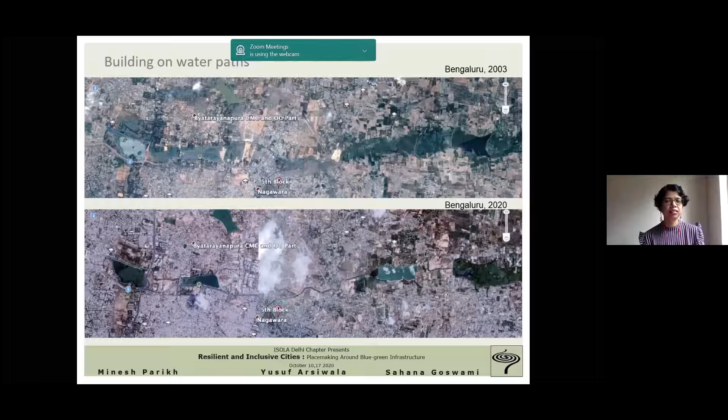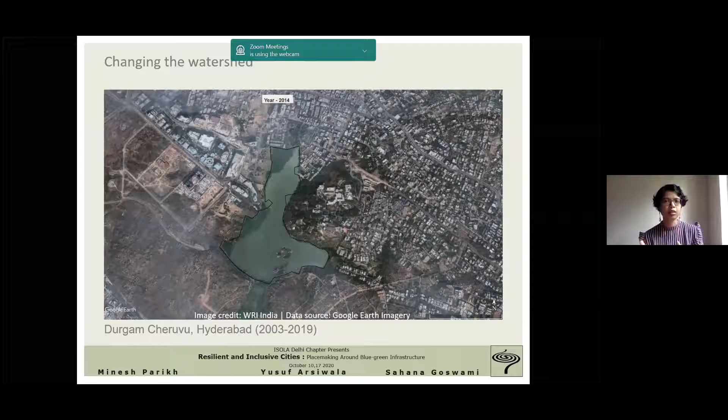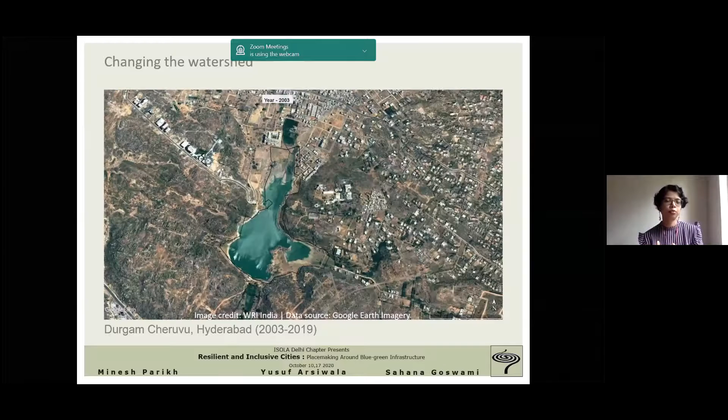Alongside where we build, the question is how extensively we are building. And we are really drastically changing the watersheds and the natural landscapes. We continuously replace areas which used to be able to soak up water with tarred roads or concrete surfaces and other impermeable layers. And eventually rainwater or stormwater is just going to flow off these in larger volumes at quicker rates and lead to events like flooding. Again, this is just a compilation of Google Earth images for the city of Hyderabad near one lake between 2003 to 2019. And we can distinctly see the amount of change that we have brought about. The next slide, please, Yusuf.

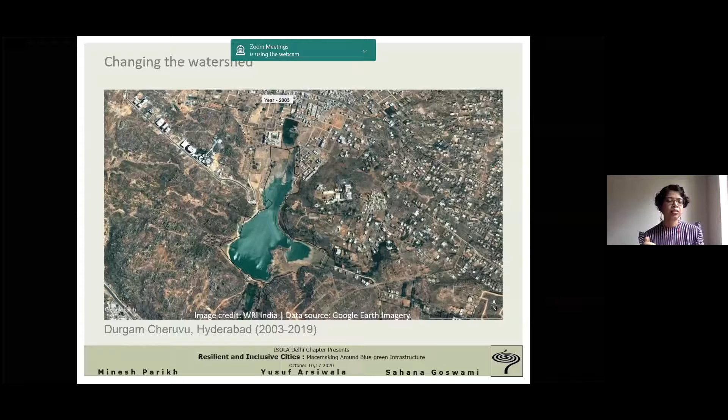So as we modify nature in our cities, we are eliminating or constraining our natural spaces, these blue-green spaces like wetlands and lakes. And in our cities where we build infrastructure and storm drains, if we build them at all, that's another question. But where we build them, they're really not capable of meeting the stresses brought about both by the way we have built our cities and the events because of climate change.

So WRI India has been developing some research based on a study of satellite imagery using remote sensing techniques. And I'll be very happy to share some of these preliminary findings for the Delhi region specifically, because I think that'll be of interest to you. But again, please keep in mind, this is preliminary. It's subject to change as we go on. Next slide, please, Yusuf.

So first off, what we looked at is what we call built up area. So this is roads and buildings. And we looked at an area of 50 kilometers from the center of Delhi. And what we see is between 2000 to 2015, this built up footprint has remarkably increased. What we call the core city area might have seen a little lesser increase, about 20%, but between 20 to 50 kilometers, it's a 116% increase. And you are people from Delhi, and you do know that this region between 20 to 50 kilometers is where Gurgaon falls, where Noida falls. Clearly, there are interconnections with where and how we are building and how that's changing the natural environment.

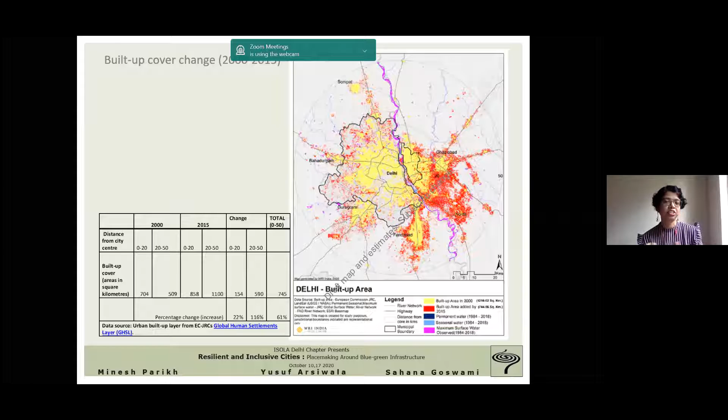But how exactly has it changed the natural environment? If we see the next slide, what we are looking at here is vegetation cover. And again, in the 0 to 20 kilometer region, if you look at the table, the top row, we see that there is low loss and low gain, which is fairly similar. But in the 20 to 50, that low loss is huge. It's like 1700 square kilometers that's lost. And what does this low loss or high loss mean in terms of a study? To put it in simple terms, high loss would indicate that there was a forest and it was chopped away.

High gain means that an entire forest grew in the 50 kilometer region. That's not happened for Delhi. But the amount of low loss means that small scale vegetation has definitely been impacted. And of course, there's one point to be made of inequity, if you will: the core city of Delhi definitely has much more green spaces than the rest of the areas.

And again, we know that having access to vegetation, along with the physical and mental health and well-being aspects, there's just the clear impacts on microclimate, on pollution, etc., that might be felt. And there's this inequity that Central Delhi definitely is getting a better deal out of this right now.

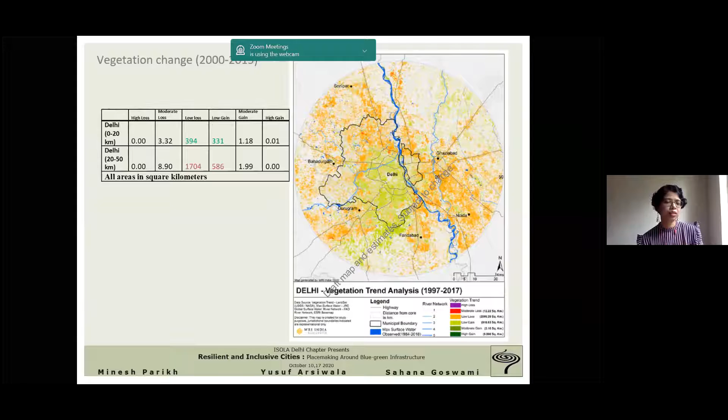And in the next slide, there's one other aspect that we looked at, which was groundwater recharge potential. I think this is something important considering the water situation in Delhi, and Delhi is fairly groundwater dependent, like much of India. In the study, what we looked at is, between 2000 and 2015, where has new development occurred? And we looked at assigning different recharge potential values based on vegetation cover and slope.

There's obviously complex equations to that, but this is the sort of mapping we get of where new development has occurred and what sort of recharge potential zones it has consumed. And what we see is 33% of new development that has happened in that entire 50 kilometer study region has been on high recharge potential zones.

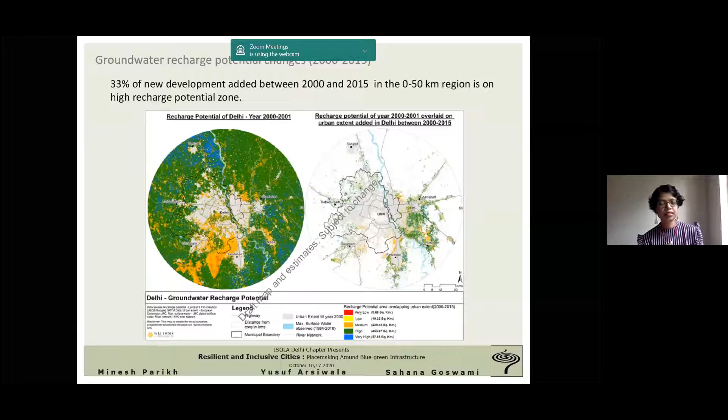And if we go to the next slide, what is the implication of that? What happens if we are building on high recharge potential zones? So on one hand, Delhi is fairly highly dependent on groundwater, but because we have built on areas where groundwater could potentially have been recharged, we have lost that volume. That volume is no longer recharging. And what is that volume that is lost?

Some estimates that we have done in this study put it at 286 million liters per day, which is huge. And if we just consider the population that's been added in Delhi, about 8.8 million in the 2000 to 2015 time period, 32% of that demand could have been met from this 286 million liters. There are implications clearly, because that water, instead of the Delhi water utility having to source from elsewhere, potentially could have come from groundwater if we had thought of this.

So clearly there's this connection that we have to think of between how and where we are growing and how it impacts our resources such as groundwater. The next slide, please.

So before I go into explaining what's on the slide, one thing to think of: all this research that I've shown, how does it impact us as landscape designers, or why should we consider this? And I truly believe that in your professional capacity as landscape designers, you have this ability to implement change, whether it's large or small.

Not everyone has to be doing huge projects, but whether it's the smallest, most effective rainwater harvesting system that you're able to construct for your client, or a rain garden, or an entire lake restoration or a rewilding of a park, all of those efforts can make a difference to the city's water scenario and water ecosystem, and eventually the entire natural ecosystem that we have.

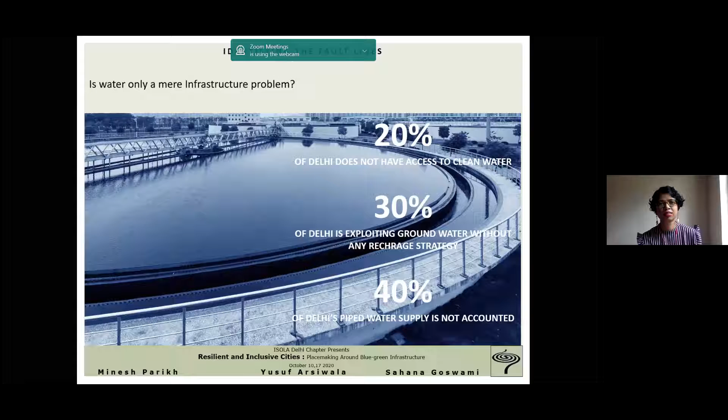So, what are the larger issues? Sahana has already gone through it, but I will be talking at a scale which is more relevant, where something can happen right now. My question is, when we talk about water, is water merely an infrastructure problem right now? Or are there certain other aspects underlying this issue?

So around 20% of Delhi still does not have access to clean water. 30% of Delhi is exploiting groundwater, as Sahana has already given a figure of how much groundwater loss we have had based on our building and increasing population. But there is still a lot of dependency on groundwater. Around 40% of the Delhi population getting piped water is not accounted for. So the agencies providing water are also running at a loss.

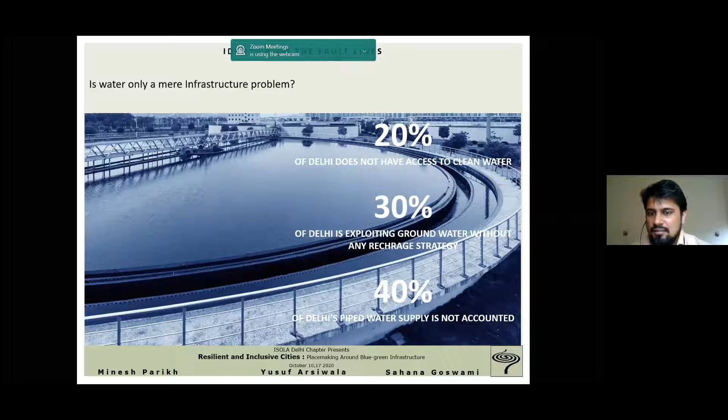So we are still building upon centralized, massive, expensive water infrastructure, and it is becoming completely outdated as we move ahead. It costs us money, valuable public land, and is not environmentally resilient. So what are the gaps? Why do we feel that water infrastructure is lagging behind? The most important reason is that the water infrastructure and the natural water systems are not being looked at together. Both of these exist in different domains.

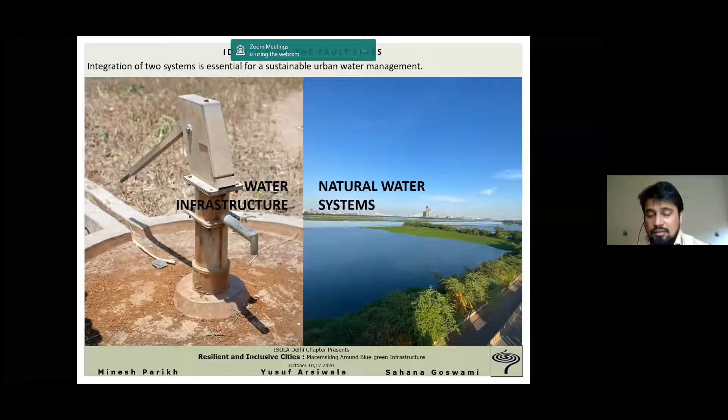So my question to the audience is, I don't know how many of you know your source of water, where your water is coming from. Is it coming from groundwater? Is it coming from a river? Is it coming from a lake? People do not know where the water is coming from, and that is the gap coming up across Delhi and across India. The system of getting water is directly proportional to how water comes into existence and is available naturally. And this is a point which has been completely ignored right now.

When we talk about the history of Delhi and the history of tanks and Bawlis, and how the water infrastructure at that time was, it clearly states that historically Delhi had decentralized water infrastructure that used groundwater as a source. We had more than 100 Bawlis historically present in Delhi. Only 10 exist right now, that too not in very good shape, and out of those, zero are in use in their original form. Most of them are archaeological sites being used as tourist destinations.

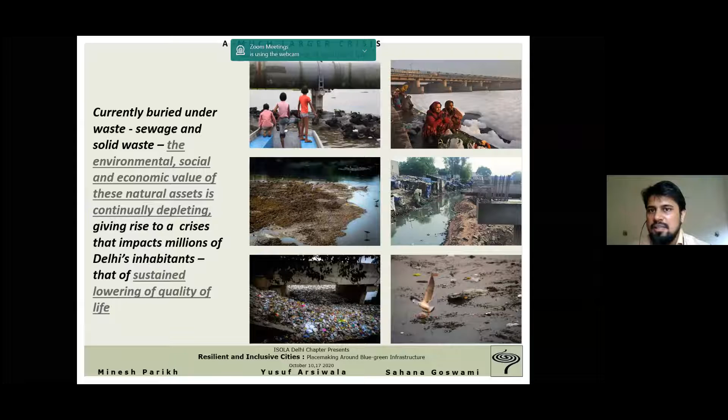Investments are hindered. The foreign investments we all talk about: foreign expats who want to come and settle in Delhi have serious reservations because of the nature of our environment and our ecology. So we all know that this is the problem. In 2016, the Delhi Jal Board realized this problem was happening at a large scale, and said, why don't we improve the situation?

If we want to quantify the problem, we have to restore around 750 kilometers of surface drains and around 1,000 water bodies. We have to recharge around 1,500 square kilometers of underground water, which will eventually improve the quality of water in the river Yamuna. After all this is done, the city's economic and ecological value would increase on a global scale.

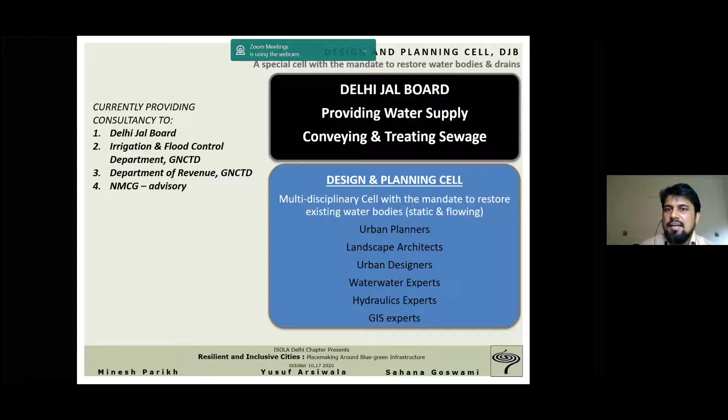To do that, the Delhi Jal Board set up a design and planning cell, a multidisciplinary cell headed by an urban planner, with landscape architects, urban designers, wastewater experts, hydraulic experts, and GIS experts. Their main aim was to look into projects which could happen on the ground to improve the quality of existing water bodies, drains, and of course the river Yamuna.

The strategy the team adopted was to implement pilots, set standards from the learnings of the pilots, roll out in a phased manner, improve processes and standards after learning the pilots' performance over time, monitor positive impacts, and then further roll out in the city. Doing a pilot helps us realize the drawbacks and the challenges ahead before we actually roll out across the city.

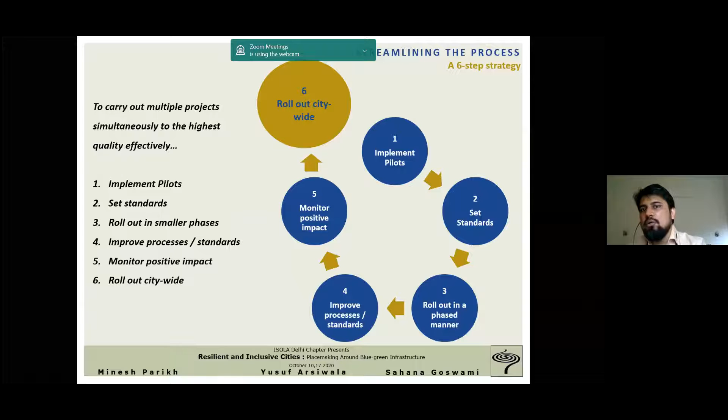Now, we know that Delhi is a massive area with a massive population across the city, crunched into a very small area. When we talk about Delhi, we talk about 3 drainage basins. One is the Najafgarh Basin, one is the Barapulla Basin, and the other one is the Shahdara Basin. The Shahdara Basin is in the east, Najafgarh is in the north and northwest, and Barapulla is in the south and southeast.

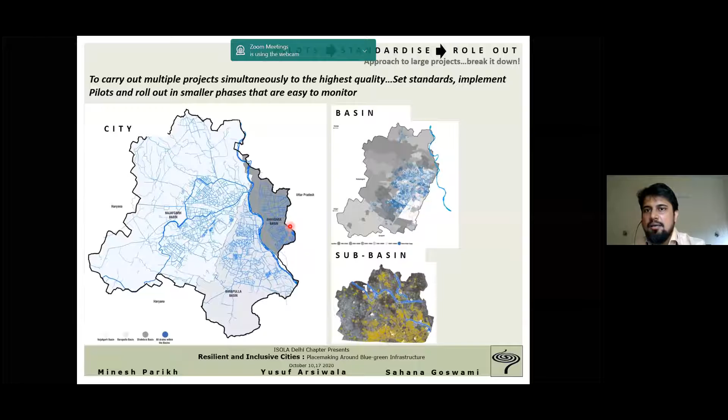So the idea was that we look into basins and divide them into sub basins. The basins are very large areas to tackle at a time, so we come down to smaller sub basins, look into the water bodies and drains in those sub basins, and start planning out pilot projects in that area. The method is pretty simple. We want to clean the drains and water bodies, restore the ecological value, and that would eventually create economic value for the city.

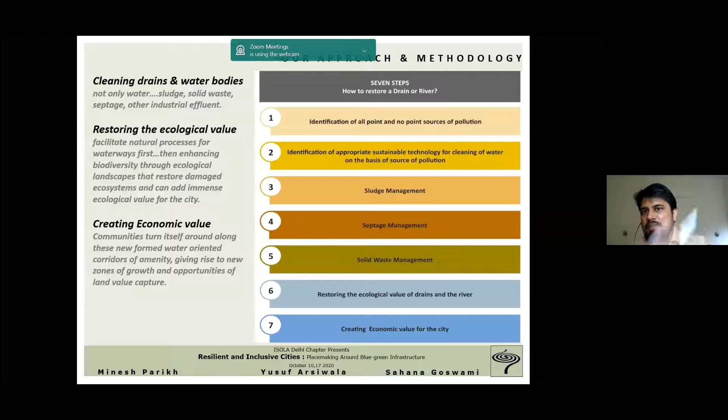The 7 steps devised by the team: we identify all the point sources of pollution in a particular water body or drain. We identify the appropriate technology that would help in cleaning the water. There would be coordination with the local authorities for sludge, septage, and solid waste management. We restore the ecological value and create a public space for the people. So the idea of people, water, and public space all combine into this 7-step method that we would implement.

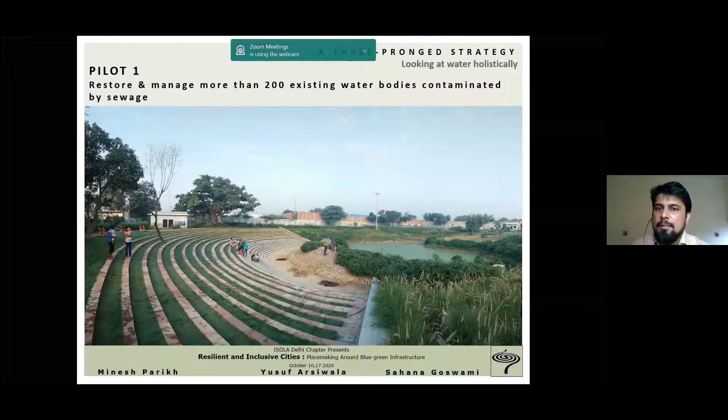Now, talking about pilots, what are the different types of pilots that can be taken up? One, which we have already done, is restoring around 200 water bodies, out of which one water body, Rajokri, has already been developed and restored on an ecological basis, where the water previously was very polluted. We installed a constructed wetland there as blue-green infrastructure and developed the area around it as a landscaped public area.

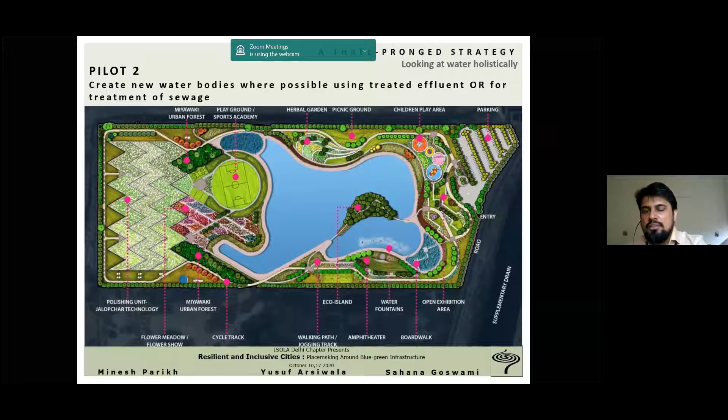The second pilot: because there is a loss of a lot of water bodies in Delhi, we need to create newer water bodies. For that, we would utilize government land and the treated effluent from the STPs, which right now is going down into the drains of no use. We would polish that treated effluent, which is an asset, and use it to create newer water bodies, and with that, a public park. One example of this approach is in Sector 25 Rohini, where the land beside an existing Delhi Jal Board STP is utilized to create this new water body and public space around it.

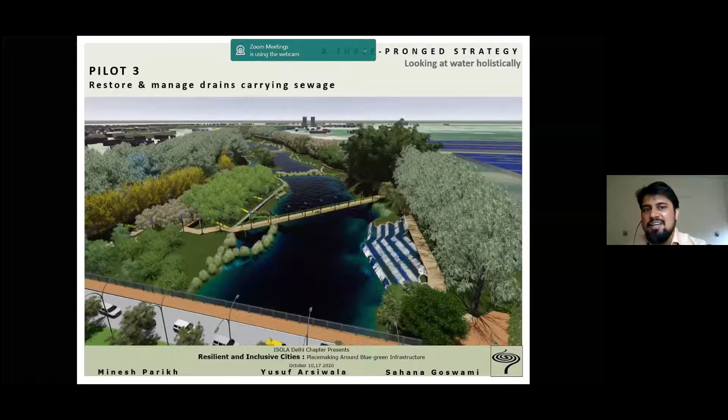The third pilot would be restoring drains. We would identify a stretch of the drain, assess and analyze the polluting points, look into how we can treat them in situ, and then develop it into ecological spines of city mobility as well as public spaces. This in turn would help us create efficient, ecologically sensitive public spaces, park systems, eco-mobility zones, walking and cycling facilities, and serve the cultural aspect of the city, bringing people back to the water and re-establishing the relationship of people, water, and ecology.

Now, because we have done certain pilots, we have seen how we can expand into larger city-level projects, because not all projects can be done by a single authority or a single consultant. So we created SOPs based on our experience of the pilots, with a step-by-step methodology of what one needs to do to restore an existing water body, create a new water body, or restore a drain. Different SOPs were created so that people, authorities, and consultants could get a step-by-step method of how to ecologically restore a natural system.

We also created landscape guidelines for landscape consultants, which can help in ecologically restoring the water body rather than using conventional landscape and park ideas to restore an ecologically sensitive zone. Those aspects were also dealt with in the department. So in the next session we will discuss in detail what we did in Rajokri, the story of Rajokri, and certain other projects we have done. So now to Minesh sir.

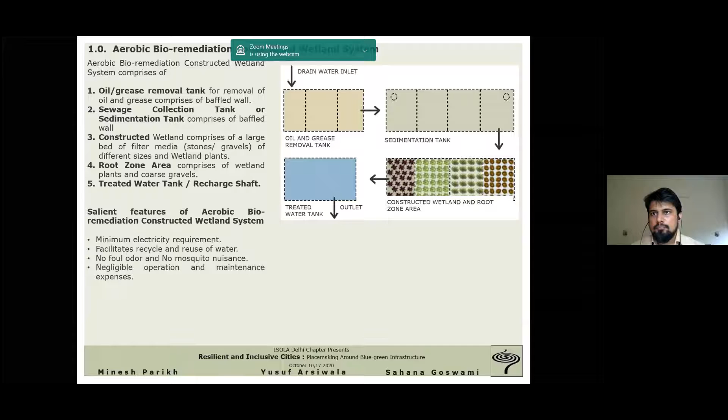And it goes into what is called a constructed wetland, where special plants, the roots of which have the quality of breaking down the pollutants and converting them into plant food, remove the pollutants from the water, and out comes reasonably cleaner and purer water. This technique is known to be capable of cleaning the water of more than 90% of its pollutants. Next, please.

Now, the same technique can be used in linear water bodies like drains, where you use the same process, but you do linear compartmentalization. Water enters from one end, and by gravity it keeps flowing through different processes and comes out reasonably clean. So this same method is very successful in a linear form to deal with what we call drains. It has been used, and it is being used in the pilot also in many of the projects. Next.

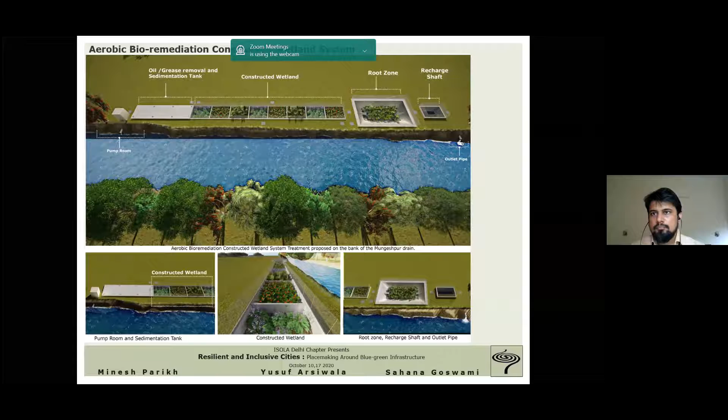Now, this is how the section works. Water goes up and down through different processes, as I have explained, and reasonably clean water comes out. The only thing is that this process is very land intensive, and it's a slow process. It is not fast, it takes time, and it consumes land. So this process is very successful if we can run it not in the core of the city, but on its periphery where land is available more easily. Next, please.

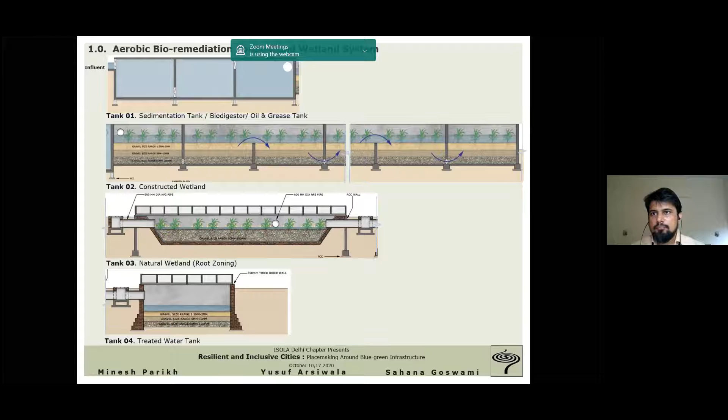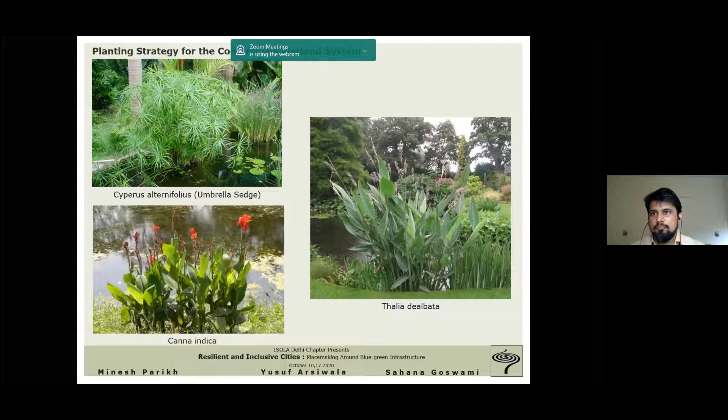So these are the plants, but the most easy and convenient that we know is what we call canna. Many of the grasses also have this quality. But canna is a very commonly available plant. Cyperus alternifolius, which is also known as umbrella palm. These two are very easy and commonly available plants, and they have this quality of cleaning the water naturally. Next, please.

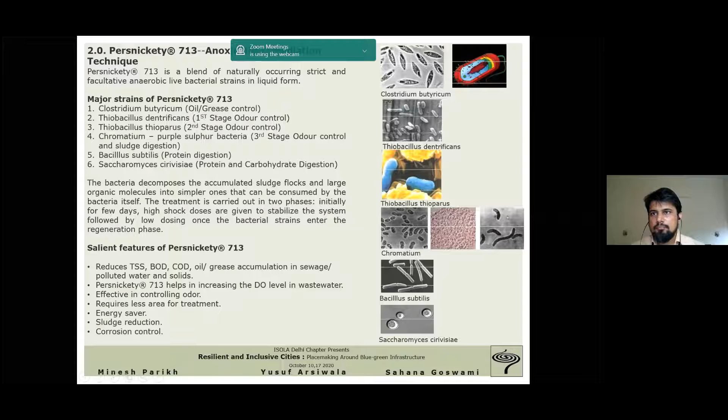Persnickety 713 is a wonder product. Over several years of research, scientists were able to isolate 5 or 6 different types of naturally occurring bacteria which have the ability to decompose certain specific types of pollutants. There is a bacteria called Clostridium butyricum, which decomposes the oil in the water. This bacteria is very extensively used in oil leaks from tankers or oil fields.

Then similarly, there are other bacteria which attack what are called sulfates or oxides of sulfur, SO2, SO3, which are foul smell producing pollutants in the water. And then there are other bacteria which attack the proteins, which are bioproducts in the water.

So Persnickety 713 is a combination of 5 or 6 such bacteria which, if introduced in a natural water body and retained at a temperature of approximately 25 degrees Celsius, plus or minus 5 degrees Celsius, through natural action multiply and clean the water. The byproduct of this application is only water, carbon dioxide and oxygen. This product is patented, but it is very useful as a shock treatment before the sustained, slow-acting natural process starts.

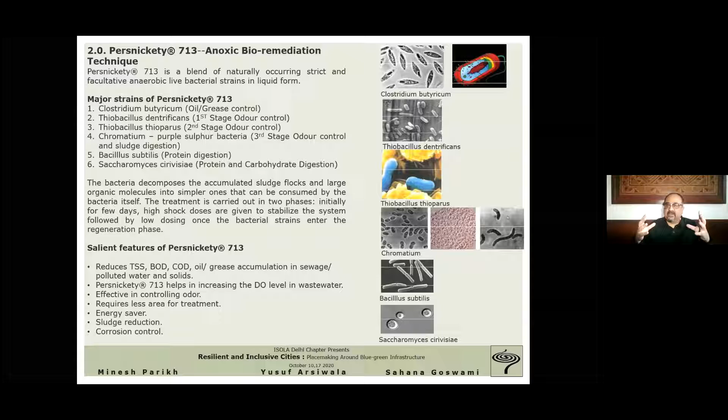So if we start dealing with a lake which has been polluted over several years, the natural process can only slowly clean a part of it. Application of an enzymatic compound like this removes 60 or 70% of accumulated pollutants in the water within a span of 2-3 months. And the root zone treatment then balances out the recurring or additional pollutant load which keeps getting added to such natural water bodies. So Persnickety is used in combination with other natural processes. Next.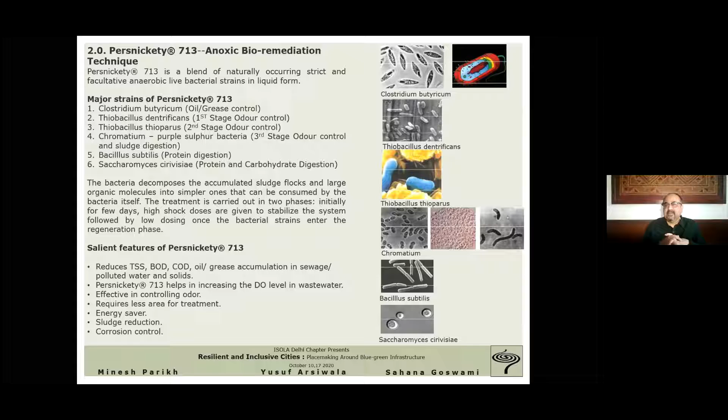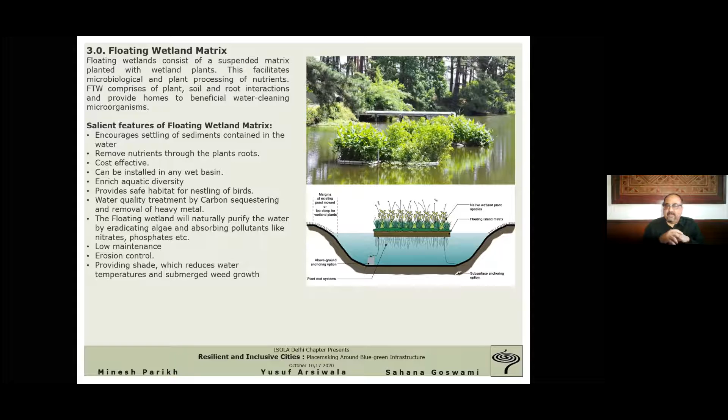The float can be made out of sealed plastic, or it can even be made out of reeds or bamboo or timber. Any kind of natural material can also be used. It is specifically very useful in very large water bodies, where it can keep traveling from place to place. Next.

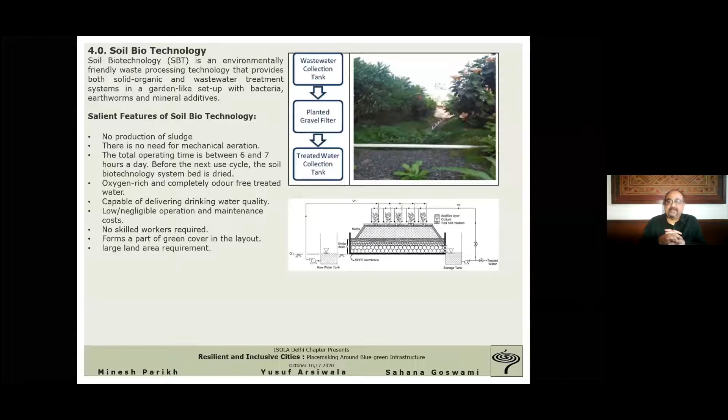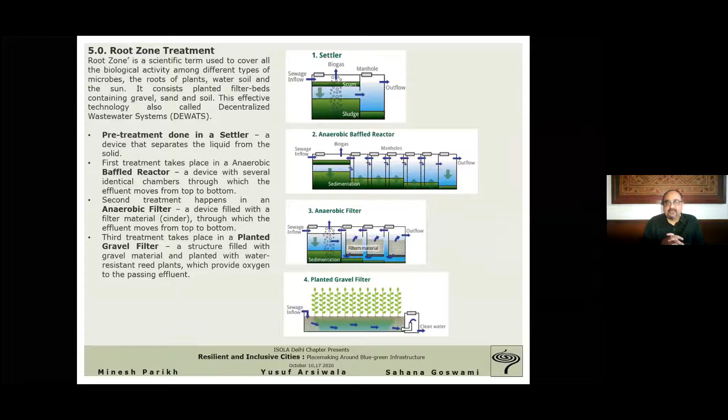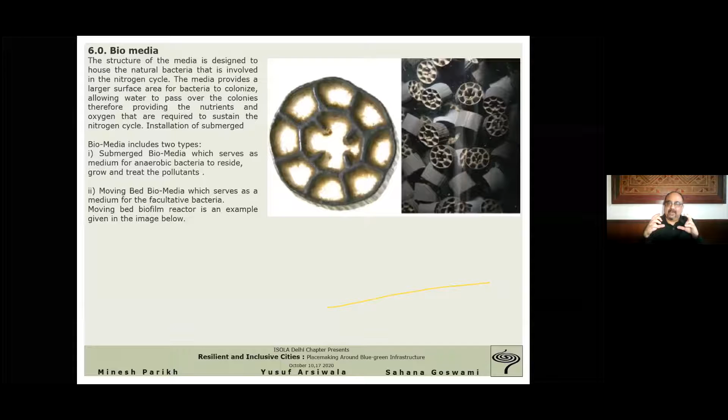These can be made out of plastic or out of clay, but plastic is the easier thing. Clay is a good thing also. And they are again used to cleanse the water. The cleansing action is taken by the bacteria, but the media provides the opportunity for the bacteria to grow in a colony, or to anchor themselves to a large surface area, which can catalyze the cleansing action. Next. Yeah, I think that's mostly it.

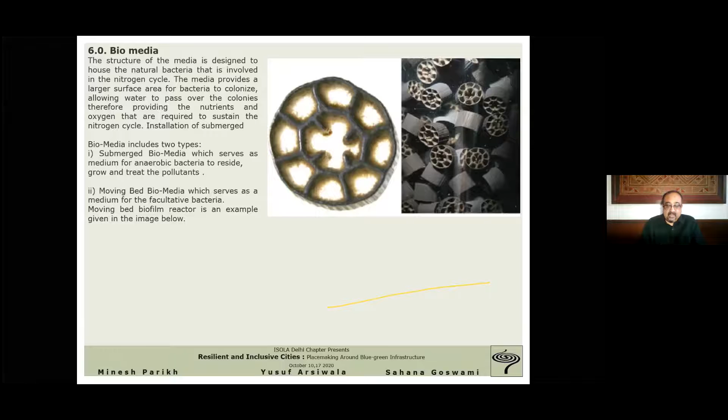So we will be having a second session coming Saturday. Yusuf, you can stop the screen share. We will be running some interesting case studies. We will also be taking our audience through several projects which are in different stages of execution or design and planning within India. And our guest Sahana is going to talk about how to deal with the funding of public projects like this. She has access to some research on this subject, because funding is always a difficult thing when we deal with the municipal bodies.